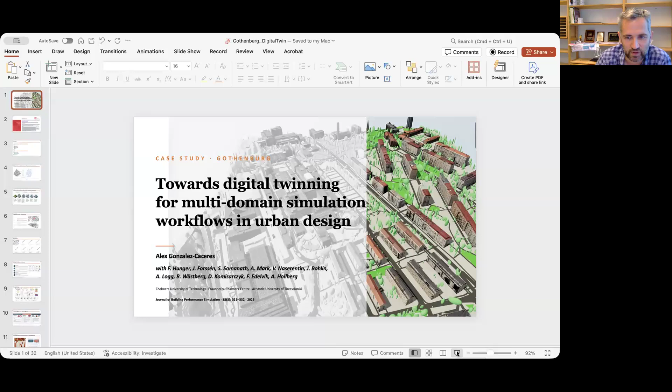Very easy. And with that, Alex, can you please share your screen and begin your talk? And as we discussed, you can introduce yourself for this. And right now we cannot see you and you are muted, so maybe we can change that too. Alex, you are muted. Oh, there we go. Okay, very good. Thank you very much for the invitation. Your talk is not in presentation mode yet. Okay. So let's try that again. Maybe now. Yeah. Let's try that. Is it working now? You're good to go.

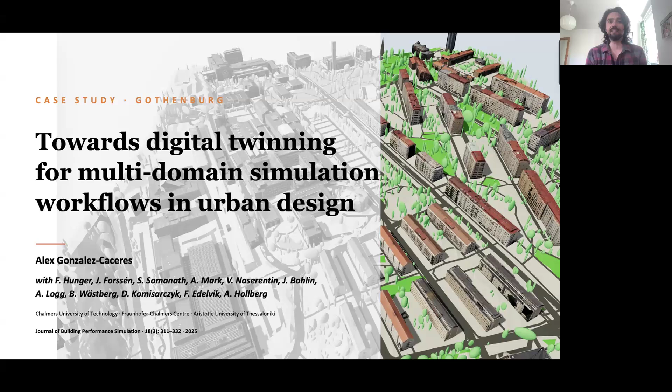I will introduce myself. My name is Alex González Cáceres. I work with wind and performance simulations, and now I'm exploring how to bring simulations into digital twin. And the project that I'm going to present today is part of the work that I did while I was in Chalmers University. This project is interdisciplinary research with different experts and different domains.

And the paper that I'm talking about and the name of this presentation is Towards Digital Twinning for Multi-Domain Simulation Workflow. And this is a case study in Gothenburg. And the motivation to do this project was to develop a pipeline where we can use different lenses to analyze urban environment and concentrate all the results and work in one workflow.

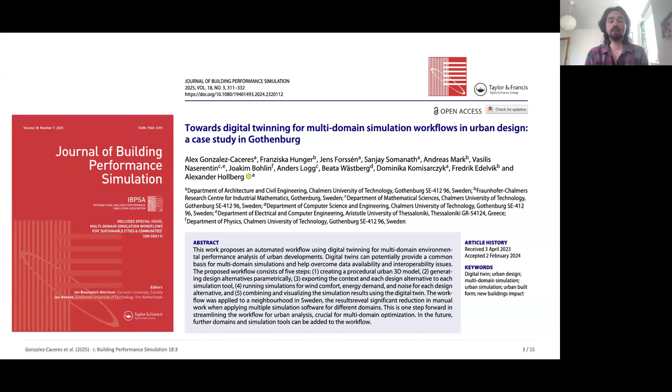Also, when we were doing the literature review to see previous works, we noticed that it's seldom that you see this type of connection between simulation programs. And that was also part of one of the motivations to do this research.

The outline of the presentation: I will first talk about the paper that I'm presenting now, followed by an introduction, where I just simply want to explain a little bit about digital twin and the concepts that we were using during the presentation. I will present the case study methodology, followed by the results.

And I also want to present my current work now, which is the link between simulations and digital twins. I will just do a very brief explanation of the methodology and the current results that we have, and I will finalize with the conclusions of both works. So

As I mentioned before, I just want to explain a little bit why we are using digital twins and how it is connected with simulations. So when we talk about digital twins, we are talking about a real environment, object, or component or system, and we create a replica or a virtual environment. And the main characteristic is that replica is connected and can bring data in real time.

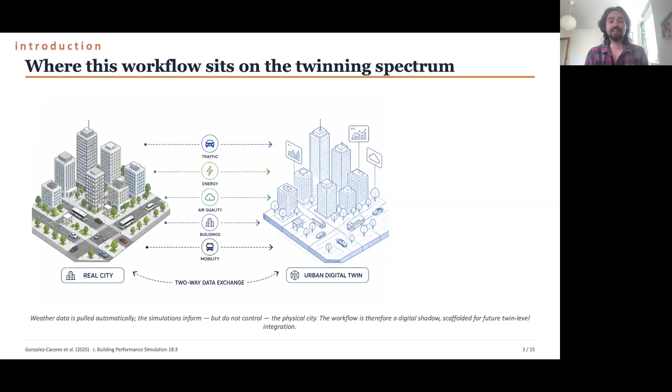And that information can be used to train algorithms or for machine learning and simulations to have a better understanding how the real world works. And in this case, cities, which are complex organisms. And here I'm using the concept of Alvin where they explain the different complexities of digital twins.

So in a first step or the most basic form, it would be the passive digital twin, which is development of the replica, and it can have different degrees of complexity. We call it level of detail. So we can start with terrain, for example, but then build up to a different complexity of the geometries, if we include architectural features into the model.

But at this level, even if it's a very complex and detailed construction of the replica, it will still be passive because there is no interaction with data. So the next level of complexity in digital twin, they call it predictive digital twin. And that's when the data comes in and it has two stages. We can process that information, run simulations or machine learning to better understand how the city actually works.

And a level up, it will be to introduce scenarios and to perform predictions based on calculations. And in this way, there is information that comes from the real world into the replica, but it doesn't go back. So that will be the second stage of the digital twin. And in other papers, this concept is also called digital shadow. And actually, this is closer to what I'm going to present today.

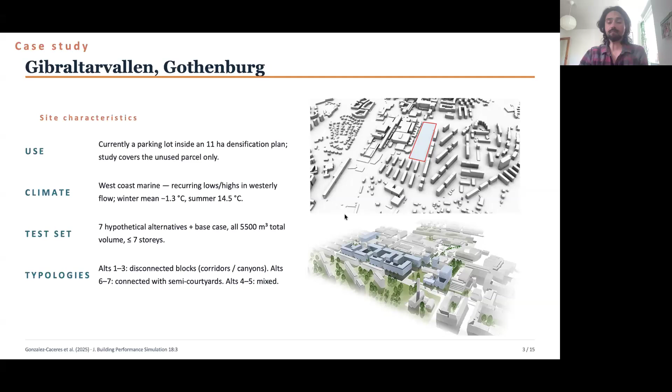And to simulate how these buildings can impact the existing environment, we developed different alternatives of architectural designs that can be placed in this area. We actually developed Grasshopper codes that build and construct alternatives under several constraints, so we can have comparable designs. So one of them was the volume, all the design alternatives to reach 5,500 cubic meters, and also they can reach up to 7 floors height.

So the model or the Grasshopper code developed maybe 1,000 combinations, and we picked the ones that were more architecturally sound, and they look more realistic of what the changes were going to be there.

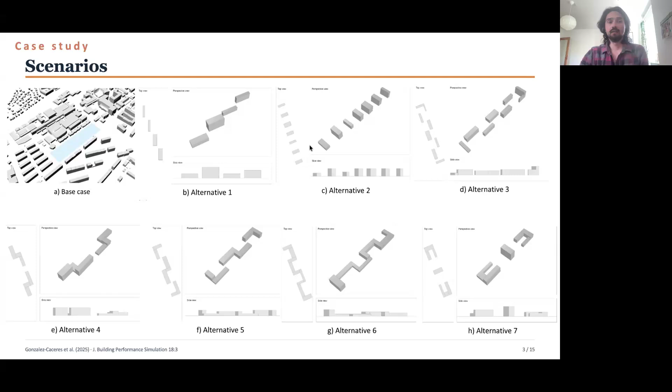There were some challenges while we were developing the workflow. One of them was to gather the geometry of the Gothenburg city to define the alternatives as well. It required some conventions between the different teams. And I think the most challenging part was interoperability, how we exchange the files, because we are working in different environments with different tools. And also each type of simulation requires different standards and inputs.

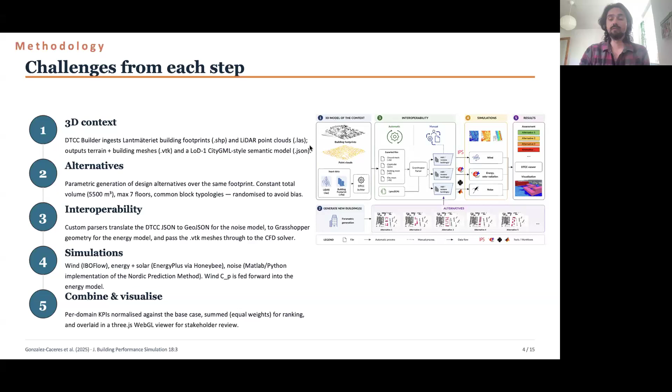Then we run simulations with the different solvers. And also it was a challenge to combine the results and how we can visualize the data, since we are all working with different software. More in detail, this is the pipeline. The 3D model was obtained through DTCC Builder. DTCC is the Digital Twin Cities Centre of Chalmers.

And they developed the model of Gothenburg using LiDAR data, which is available, I think, by request. And this is at a national level, so the data is for the entire Sweden. And I think what they do is they clean the point clouds, and you can discover the volumes of the buildings. And that, in combination with the building footprints, generates the 3D model of the entire city. And that file is the one that we share across the different domains.

That file was divided in different layers, like ground, city model, each building, and it was analyzed and cleaned through Grasshopper. That requires some manual work because we were focusing on a neighborhood, and each type of simulation needs a different scale or range of the city. For example, for wind comfort and wind speed, the area of impact is much larger than for acoustics. So to save computational time, we manually cleaned the 3D model for each domain.

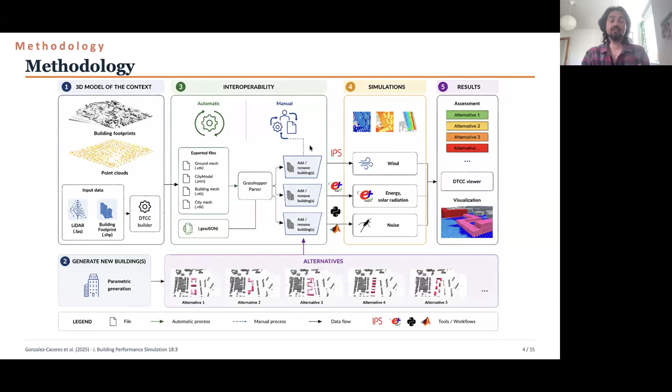The next step is after we exported the same file in different formats, we run the simulations with 3 main solvers for wind comfort, energy, solar radiation, and noise. And finally, we organized a way to compare the different results and score them, so we can define which alternative will have the best performance. And finally, we use a visualizer that was tailored for this project, where we can put together all the data and results, so we can make sense of the results. Also, we can share the data with others.

So as I mentioned before, we use 3 solvers. For the wind speed and wind comfort, we use IBOFlow, which is a tool developed in Chalmers, and it's been validated for urban wind simulations. This tool was coupled with EnergyPlus to calculate the pressure coefficients, which have an impact on the infiltration losses.

For the energy simulation, we use EnergyPlus, as I mentioned, and also Honeybee. The inputs that we use were based on standards such as ASHRAE, and also we share the same weather file. And for the noise calculations, we use the Nordic prediction method, which is a local standard for traffic noise. And these calculations were done through MATLAB and Python.

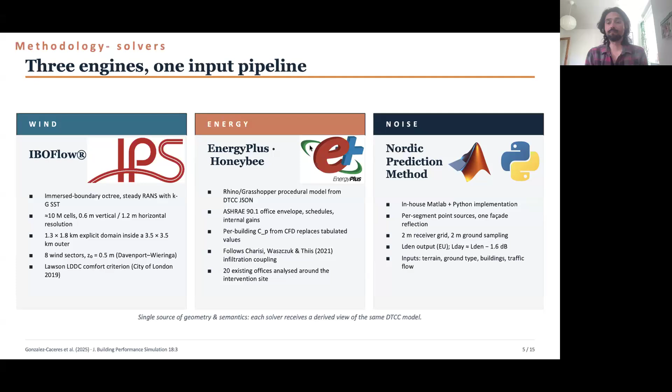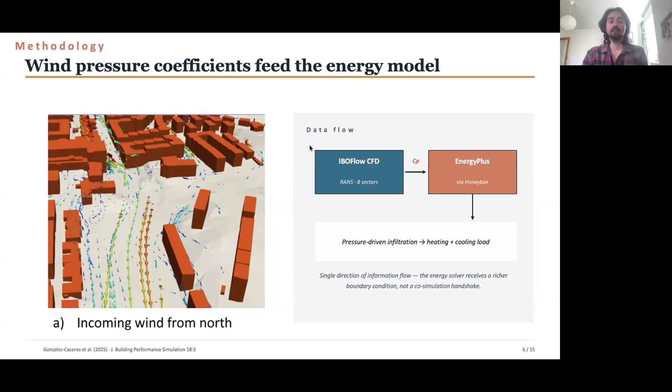And as I mentioned before, we couple the wind speed with the energy simulations to have a more accurate result of the impact that these different alternatives will have. So what we did is to calculate the pressure coefficients for the base case scenario and also for each alternative. So that gives us a sensitive parameter that impacts when the buildings are high or there are even open areas where the wind tends to be stronger.

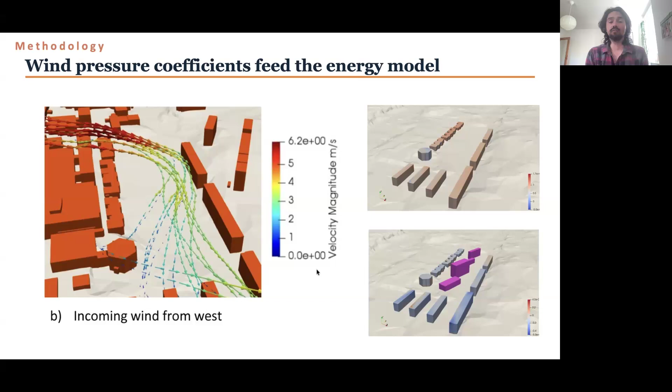Now I'm jumping into the results of the energy simulations. What we see here is the base case scenario where there are no buildings, and we calculated the energy consumption for the surrounding buildings. We initially calculated for a larger area, but we saw that there was no impact. So what I'm showing now is the one that actually has changes.

And when we compare the alternatives against the base case scenario, we saw that all the alternatives have a negative impact on the heating demand of the surrounding and the existing buildings. However, there are alternatives that produce less consumption, and that will be alternative 5. And later we convert this impact into percentages, so the values are normalized and we can compare them through different domains.

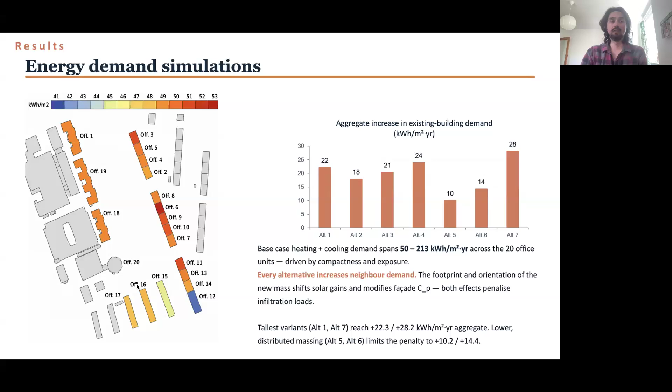To have a better understanding why the energy demand was increasing, we run solar radiation simulations, because the main factor besides the pressure coefficient and the infiltration was the shadowing produced by the different alternatives. And we noticed that one of the main factors on the shadowing was the height of the volumes and the proximity towards the existing buildings.

So what we see here is the base case scenario with the solar radiation. And the other plots show the opposite: how much solar radiation was taken because of the new buildings that were going to be placed there. So the reddish color means less solar radiation because of the shadow. And this calculation was done on a yearly level.

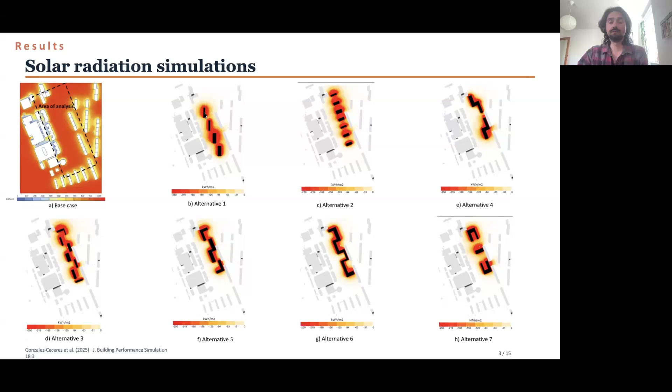For the noise simulations, we have the base case scenario, and there is like a straight line, and that's where the traffic goes. Based on the results, the base case shows that the noise propagation is quite high. And when we run the alternatives and the new designs, we notice that all of them impact positively in the surrounding environment. There is a reduction of up to 9 decibels in some spots.

And this shows us that depending on the configuration of the volumes, the impact can be greater. The best alternatives were alternative 1 and 3, which reduced the traffic noise up to 35%.

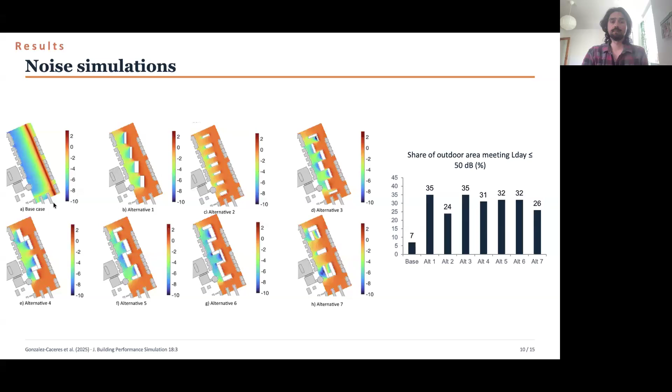And yeah, there is also something I forgot. With wind comfort, the higher the activity, the more energy consuming the activity, the higher wind speed you can take and be comfortable. So if you're sitting, you will be more susceptible to high speed. So that's why standing is more energy consuming than sitting.

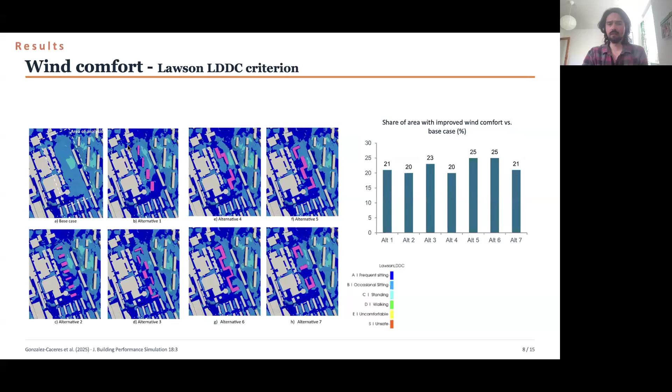When we put together the results from the 3 domains, we noticed that there wasn't an alternative that performed best in all the domains. But since we normalized them, we were able to compare them and to pick the ones that score the highest. That will be alternative 1 and 5.

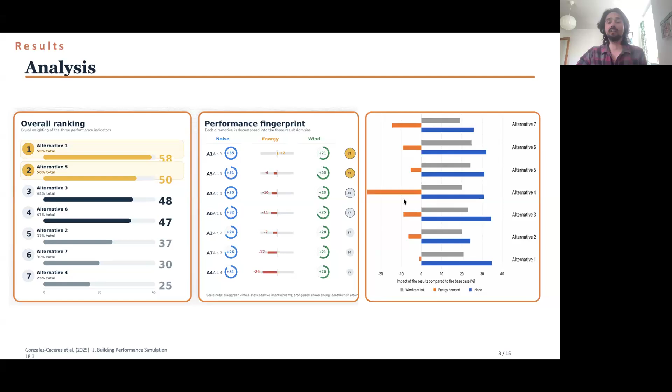As I mentioned before, we developed this visualization tool where we can plot the results and compare the different scenarios. This was useful for us to understand the data better, but also to share the information with others that are not into simulations. So other stakeholders were able to interact with the data and test how different alternatives can impact the existing environment.

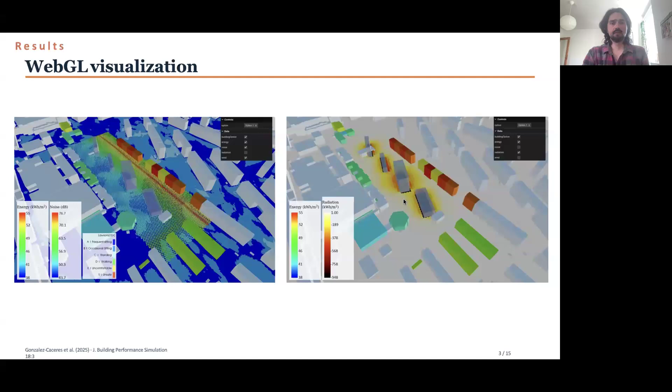Now I want to show the current state of the project, and this is the area that we were looking at.

Oh, I cannot. Oh, yeah. Okay, sorry. Maybe now it will work. Okay, sorry. Yes,

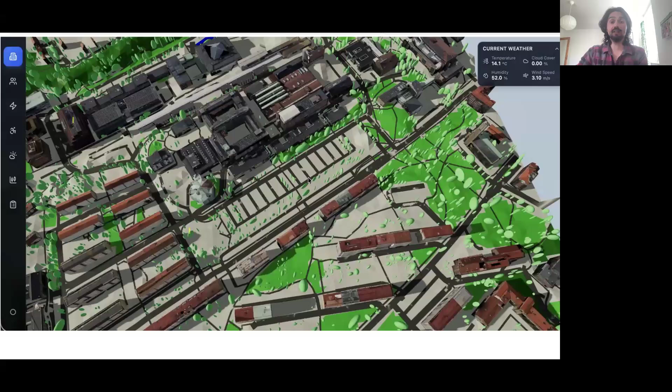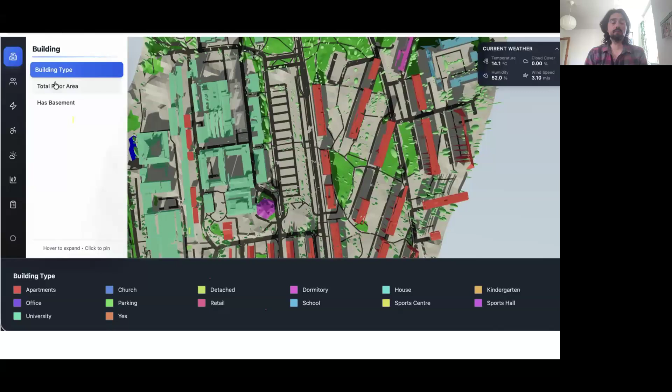This is the area that we were studying in Gothenburg. This is near Chalmers University, and we can see the area where the different alternatives were tested. And this tool that we are looking at now is one of the projects that I'm currently working on, which is a workflow to develop digital replicas for cities. So we don't only take into account the geometry, but what we are trying to add in the pipeline is how to connect real-time data into the 3D model.

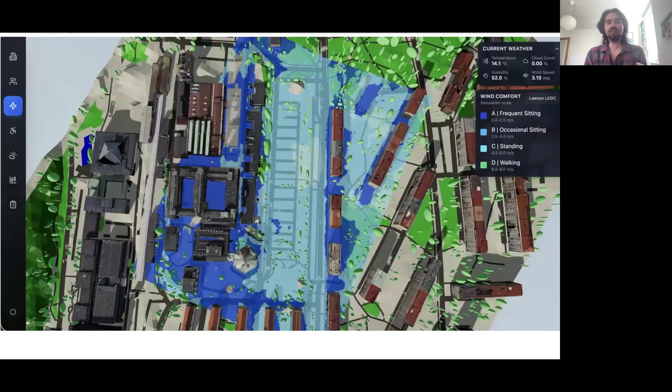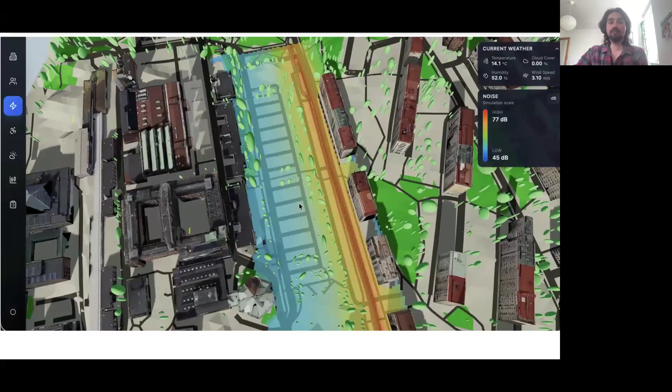What we're seeing now is the results that were already computed from the previous work. As it is now, the tool is designed to import data if it's correctly formatted, so that it can be placed, if it's geo-referenced. So now what it's showing is the noise calculations. I will speed this up a little bit.

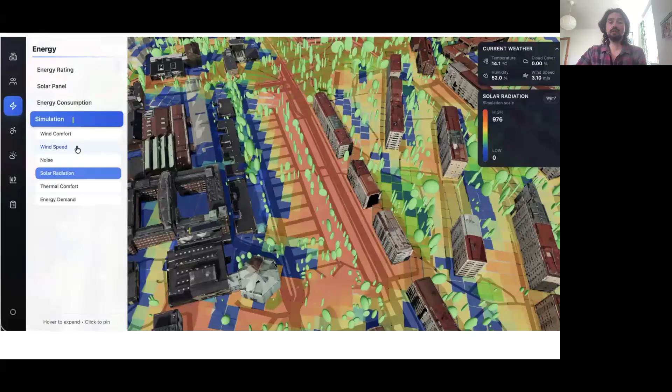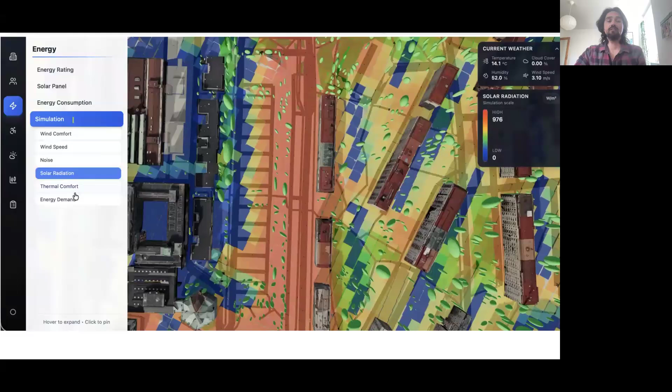We also added into the tool the options to perform simulations, since the tool originally was designed to evaluate built environments for specific users, which is the aging population. And for that, it's important to include thermal comfort and wind speed.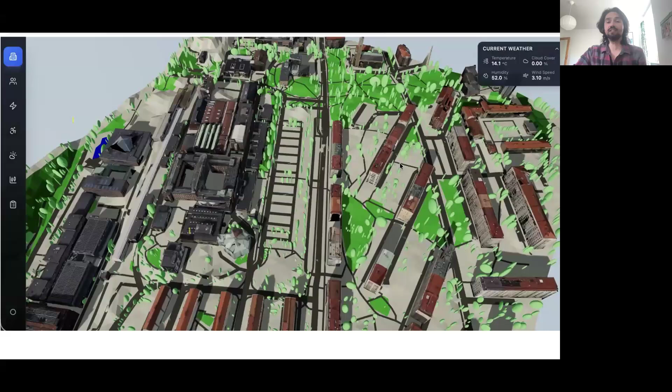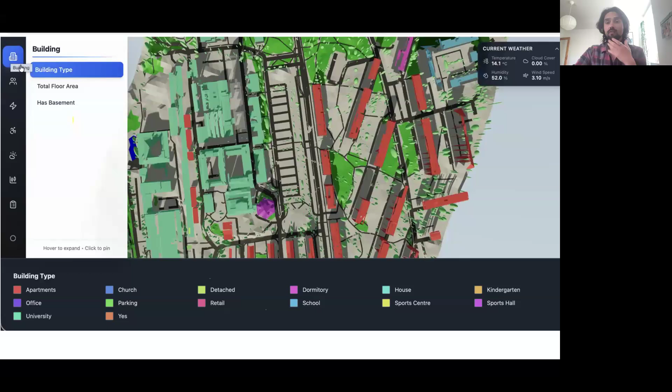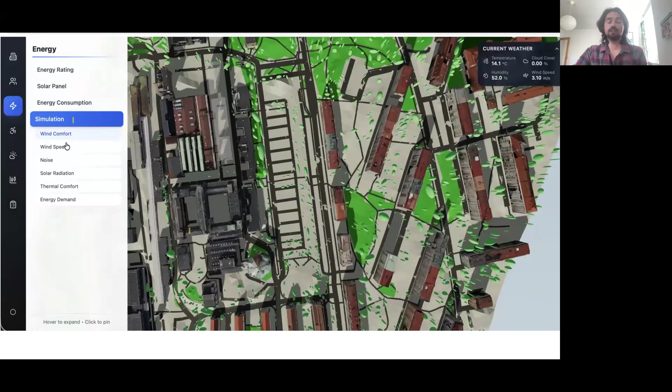What the tool does is compute the simulations silently, especially energy demand. And that's one of the challenges that we have now, because it works on tiles, and depending on the size and the complexity of the buildings, the simulations can take longer than the resolution of the data transfer. Normally the weather data is captured every 15 minutes, but we are trying to solve it so the simulations are updated every hour.

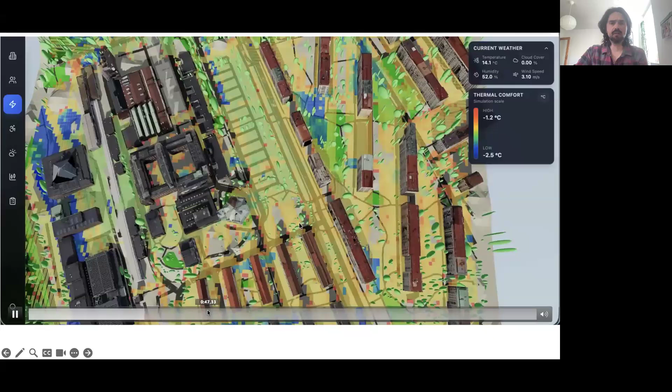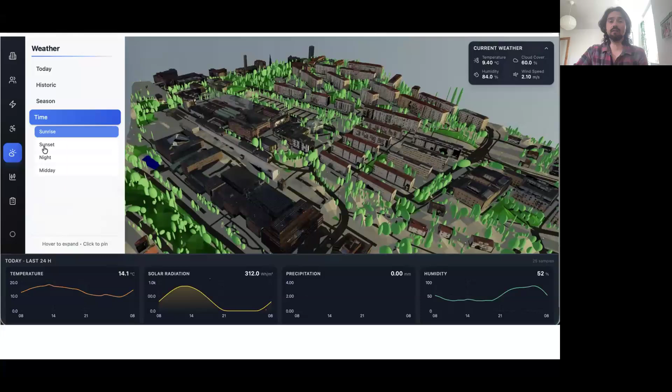Okay, so I will just briefly show the wind speed simulations and thermal comfort. It was also important for us since the tool was thought not only for experts, but to show data and turn it into information. So the interface and part of the calculations also modify the model, especially with the weather data. So depending on the weather conditions, the 3D environment will change. For example, this is winter. The lighting also changes during the day for sunset and sunrise, and it calculates the shadowing also based on the cloud cover.

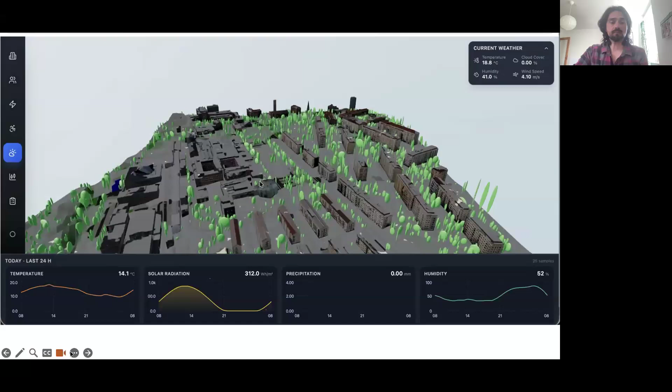As I mentioned, this tool is originally intended to analyze the urban environment, but under the lens of senior citizens. And the case that was used was Guldheden. It's also in Gothenburg, and this area has a particularity as it has a higher density of seniors. The average in Gothenburg is around 15%, while in Guldheden it is almost 24. And it's also a challenging area because it's quite hilly, but it's built with a lot of facilities that are important for the aging population.

The metrics that we incorporate in the tool are accessibility metrics, thermal comfort, lighting and visual environment, safety hazard indicators, mobility supports, and social environmental well-being. For some of them, we don't need simulations. It's calculation based on the data that is captured while we are producing the replica. But for the thermal comfort, we use the indoor environment of each building, the energy demand, to calculate the energy level of the buildings, and thermal comfort, which is calculated on the surroundings of the neighborhood.

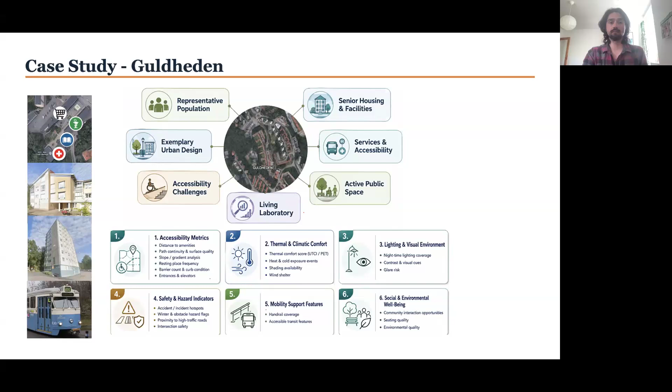To build the tool, we use three different sources of data. First, we use satellite imagery to calculate the layout of each building.

For the window detection, we use Google Street View and a LiDAR scanner. This was ground-based; the LiDAR scanner was aerial, and we use it more for verification, to check if the calculations done with Google Street View were correct.

Then we process the layout of the buildings and the roof that is first detected through satellite imagery. We use a code pipeline which tries to mimic what the architect was thinking when they designed the roof. Based mostly on architectural logic and the shape of the building, we add helpers to fix gaps or issues that the satellite imagery roof had.

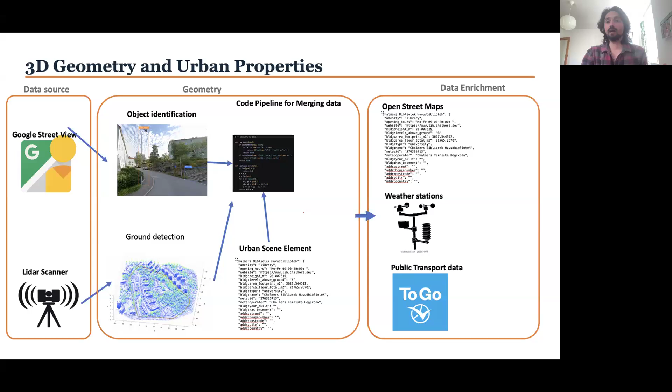Also, we connect the public transportation through a database from ToGo, Västtrafik, where we have access to the different public transport that are in place, and we can add them into the tool.

These are two different results. The one on the left is the 3D model we get from photogrammetry, and the one on the right is from our old pipeline, where we were just trusting OpenStreetMap data, using the helpers I mentioned before, the architectural code that tries to understand how the roof works.

But we noticed there are some differences, not only in the design of the buildings, but also in the orientations. So they are not quite the same, and I think the satellite image is more accurate.

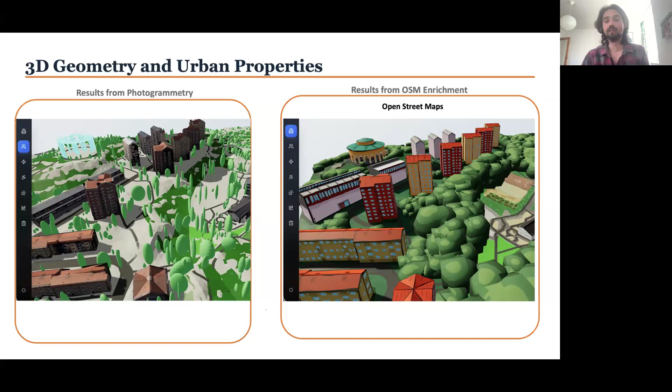Another challenge is the computational time, which affects the simulations as I mentioned before. Also, as it is now, we cannot build one replica for the entire city, as it's too heavy and too expensive for the computers we have. So what we do is calculate the density of the buildings in that area, and based on that, we define the size of the tile.

It's more like a dynamic calculation. It's not a fixed area that we use for each tile.

One of the things we tried was to use dynamic resolution to reduce the computational time. So instead of doing the simulations hourly, we tested if we could do it every 4 hours.

And the problem remained. I think the more complex the buildings, the bigger they are, and the more dense the area is, even if we change the resolution, we're still not able to compute all the buildings before the next update of the database. So what we're doing now is to dynamically reduce the area of impact of each tile.

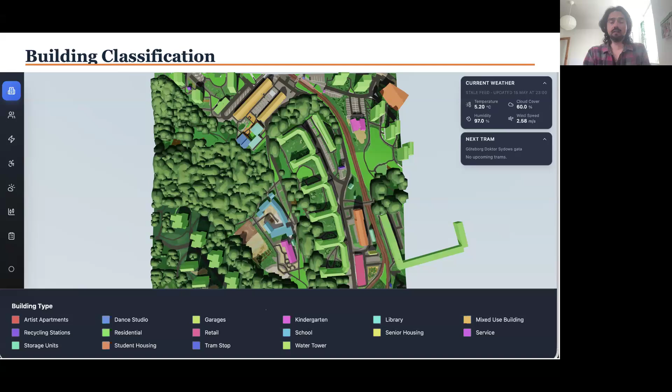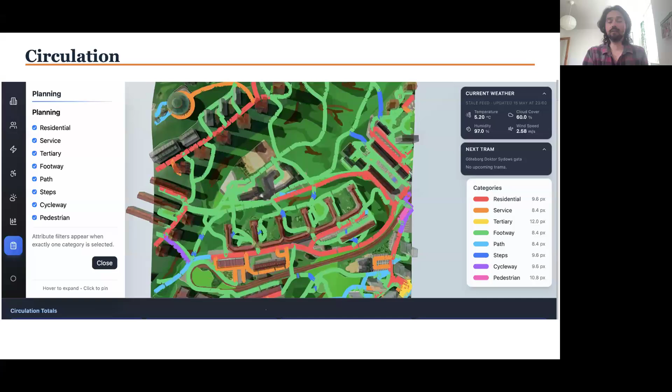Also, with the data I mentioned before, we can estimate the population for each building, and also the different types of circulations there are in the area. These are the main sources of information we use to understand if the built environment is friendly to elderly adults.

One of the things we do is compute the distance from a specific building towards important destinations such as pharmacies, clinics, grocery stores, and parks, and based on the distance, we compute different levels of risk.

We consider if there are benches on the way, the lighting that is in place, the type of surface, and the thermal comfort. Based on those results, we score how well placed a building is and how friendly the connection is, also considering the slope of the trajectory. The more dangerous the paths are, the lower the score, along with the surrounding environment.

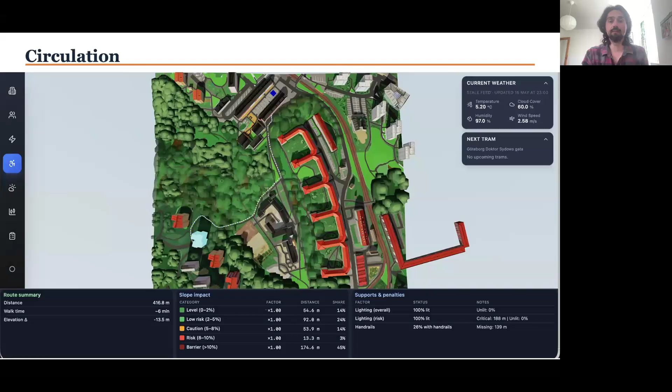These are the results from the study. We analyzed the different heights and the terrain.

We also did clustering based on the population and similar characteristics that buildings have, to form groups of buildings based on their connections, where they are allocated, and the number of users they have. Based on that, we calculated how friendly and how easy to access these buildings are.

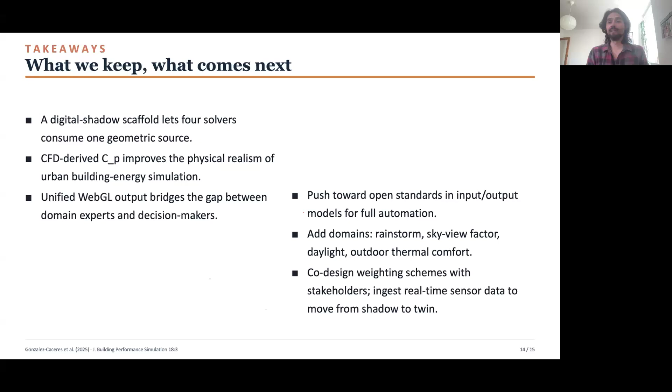And with this, I finish my presentation.

Thank you very much. Thank you, Alex, for this fascinating dive and a lot of nice videos and pictures, and a lot of work behind it, I'm sure.